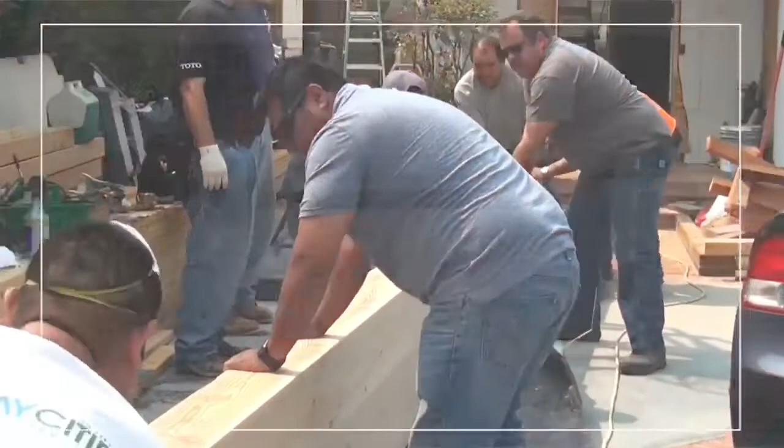It's been a while. We took some time to get some footage together and some pictures of Ridgecrest. For those of you that don't know, here in Southern California we had our biggest earthquake in 20 years, and it happened in the desert. So we went out there to check it out, to see what we can learn so that we can provide amazing projects for our customers.

And the best thing for us was to go out there and get into the field and learn how the ground broke, how the buildings behaved, and what we need to do. So let's get into it. So what can we learn from Ridgecrest?

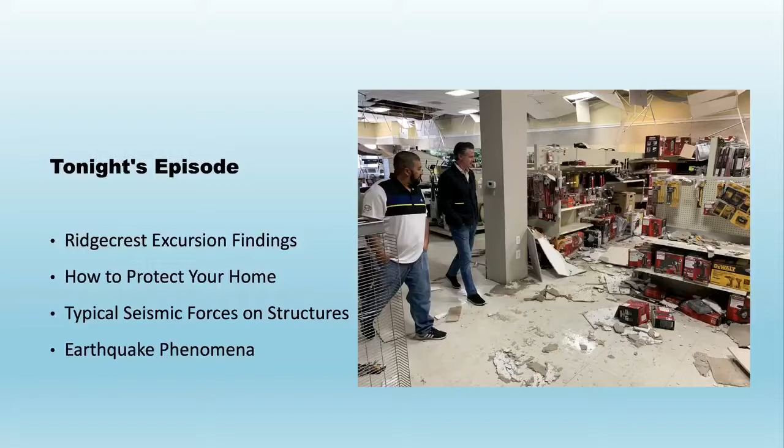Anyhow, so we're going to talk about how we're going to protect houses, what we learned, and how we can protect some houses. We're also going to talk about typical seismic forces on structures and the earthquake phenomena, like what happens during an earthquake and what kind of damage we can expect to see. So, Ridgecrest, the excursion begins.

So let's just do a little quick recap. Look, I'm not Dr. Lucy Jones. On the 4th of July, we had the first earthquake that ended up being a foreshock. And then on the 5th of July, we ended up having a 7.1. In case you didn't know, that's the biggest earthquake that California's had in 20 years.

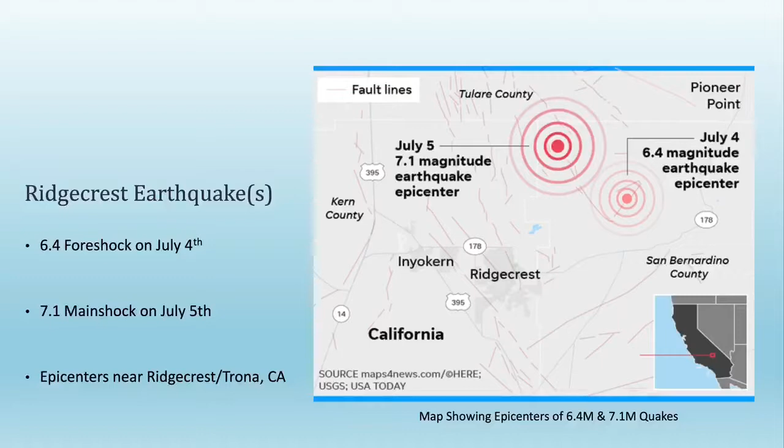And believe me, it's the longest. It was a lot longer than Northridge. It lasted well over a minute. Northridge is about 12 or 15 seconds, something like that. So it's definitely a lot stronger. Since the foreshock and the actual earthquake, there's been thousands of aftershocks, and I'm sure you guys have seen that stuff in the news.

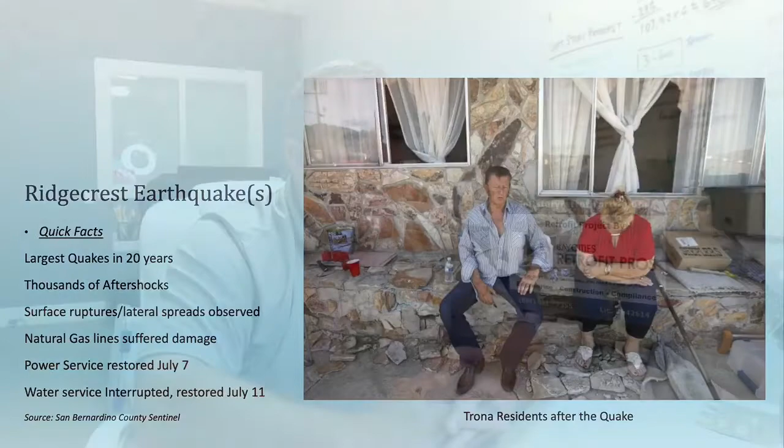I just recently went to the SEAOSC convention, and a few engineers covered a lot of damage, and they explained it. So I'm gonna share with you some of the knowledge that they passed on. The Structural Engineers Association of Southern California, awesome people, very talented, very dedicated engineers. So we're going to talk about some of the gas line rupture, power service.

Power wasn't restored, by the way, until July 7th. That's 2 days of no power. And the water was disrupted until July 11th. So remember, it was the desert. Not a good place to be without water.

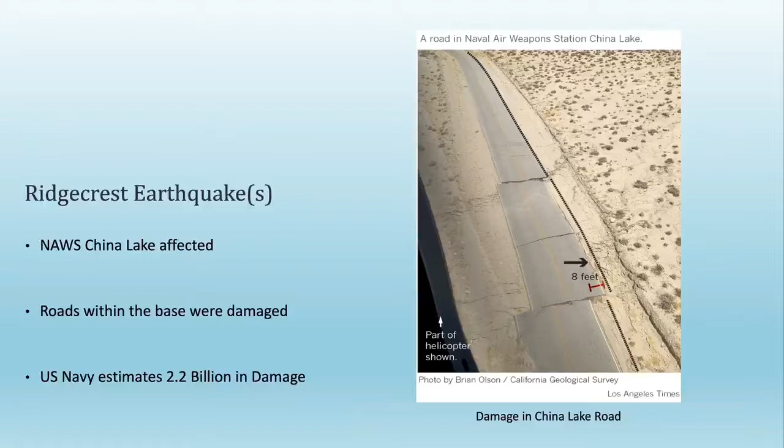So this is an overview shot of that road. We actually traveled on that road. It had been fixed by the time that we got there, but it was displaced by 8 feet. It's pretty significant. The naval base, China Lake, supposedly suffered a little bit over $2 billion worth of damage. That was probably catastrophic, but no one's been able to go down there. They haven't allowed the news cameras to see.

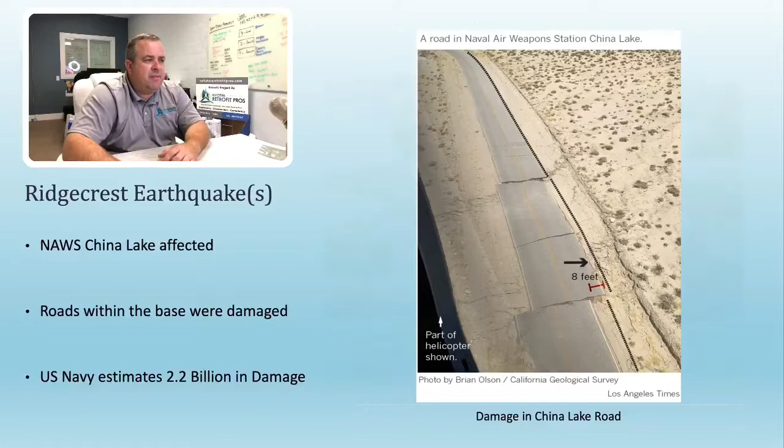So, people are speculating. I think the first numbers that came out were like 6 billion or something like that. So it's 5 billion, 5.5, a bunch of different numbers came out. So I think the agreed upon current number is about 2.2 billion. It's a lot, believe me. To have 2.2 billion dollars of damage in the middle of nowhere, there's a lot of damage.

So okay, so let's talk about what we learned. So this is one of the shots that Brian and I took, of a trailer park in Ridgecrest, and basically, I guess a good way to describe it is that it slipped off the foundation, or it slipped off the piers. So you can see here, this is a picture that I took. The displacement's about 20 inches. So where my hand is in this picture is basically the edge of the concrete.

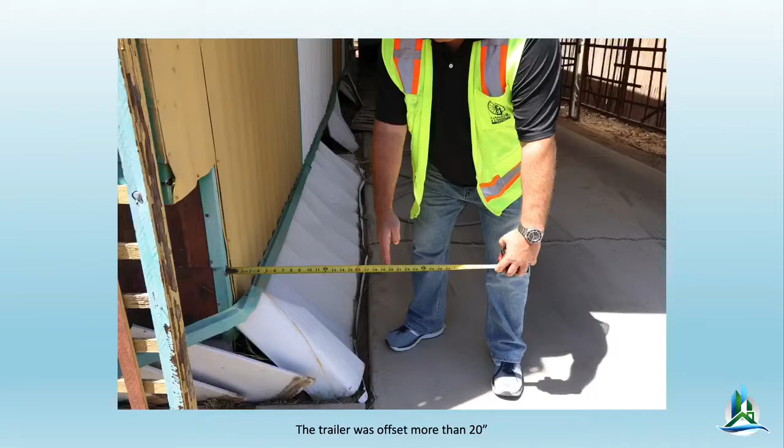And when the trailer slipped off the piers, it basically fell to my left in this picture, or actually, if we're looking at it, to the left. Anyway, it's pretty interesting to see that. Pretty much, maybe it was like 75% of the trailers in that park slipped off the piers. This one here, obviously you can see that it's got fire damage, it's a total loss.

But I was talking to some of the neighbors, and they explained to me that the owners were an elderly couple, and during the earthquake they got so freaked out they ran out of the house, and something was left on, and it caught fire. So I don't know. I mean, that's the story I was told in the field. I wasn't there.

But I think that it's important to note that if there would have been a gas shutoff valve on this building, and on some of the other ones that were burnt, for that matter, the shutoff valve would have tripped, and immediately the flame would have terminated. So at least hypothetically, that could have been prevented.

Now, I want to just kind of recap. This is a picture of the trailer park after the Northridge earthquake. It was in the North Valley. And again, this was all caused by fires. If people were to install this little easy gas shutoff valve on the gas meter itself, a lot of these fires could be prevented.

So let's talk about how to protect a home. For those of you who don't know, we do seismic retrofitting. We do earthquake bolt downs for single families, and we also do soft story retrofitting for big apartment buildings. We're going to be talking about houses now. The idea is that we went to Ridgecrest, we saw the damage, and now we take what we learned in the field and start applying it to bolt downs.

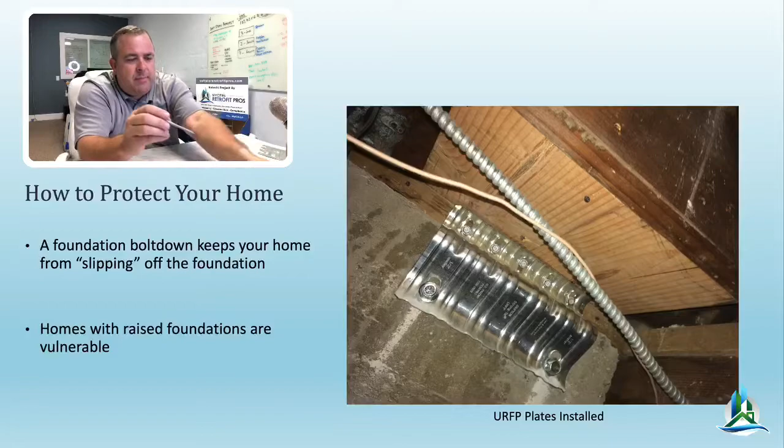So you use basically these bolts. These are SDS screws. Again, these come in the kit with the plate. So these go through here, and they screw onto the mud sill. And then in these holes here, we install Simpson Titens, or you can epoxy it. In our picture, this is actually a job that we did. It's not a completed assembly, but it's a nice close-up shot with good lighting, because it's hard to do that under the house. In this case, we pre-drilled the hole into the stem wall, and we put in a Simpson Titen bolt.

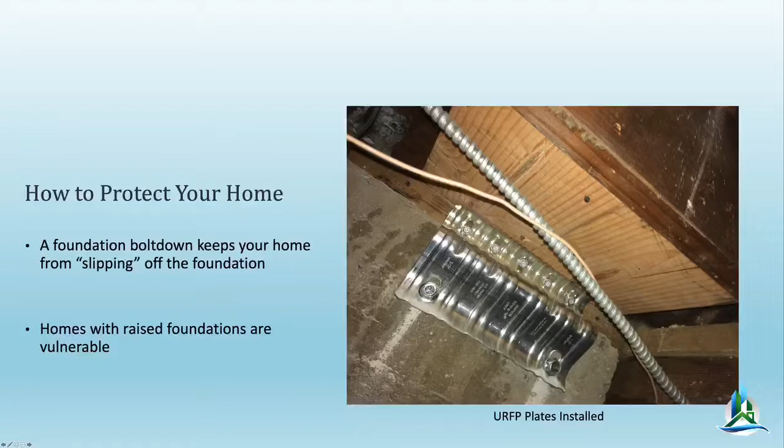It's an amazing piece of technology. It's approved to just drive it in to masonry, and you don't need any epoxy or anything like that. For those of you that notice there's a nice fresh piece of wood on our bolt downs, we install 4x blocking. That's 4 inches thick by, I think in this case, a 16-inch piece, and it's horizontal, and it's basically designed to help transfer the load over. I'll show you some of the pictures of this.

But what we're trying to do here is, if you notice, here's the 4x. This isn't finished, but in a scenario where the floor joists are running parallel to the stem wall, we'll put the blocking in place. And what we want to do is increase the footprint of the connections. So we want to add more wood to the existing building, and then we want to tie it into the new steel members, right? So this would be the new steel members.

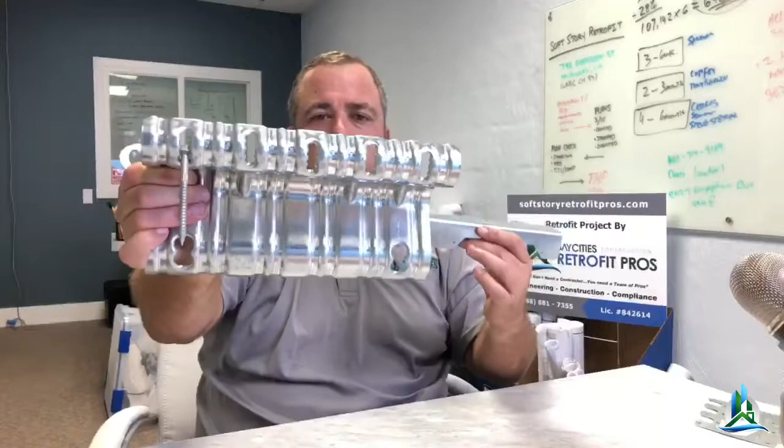In other cases, we tie the mud sill to the blocking. So this goes on the mud sill. This would be installed kind of like this, where this is holding the mud sill to the stem wall, and then this is holding the mud sill to the blocking, which is tying up the floor system, the floor joists. So together, you're going to get some pretty nice functioning drag. So let me show you the next diagram, because I think it'll put in perspective what we're talking about here.

Like Isaac, this is Isaac, one of my guys here. He looks like a train robber. It's pretty dirty in there.

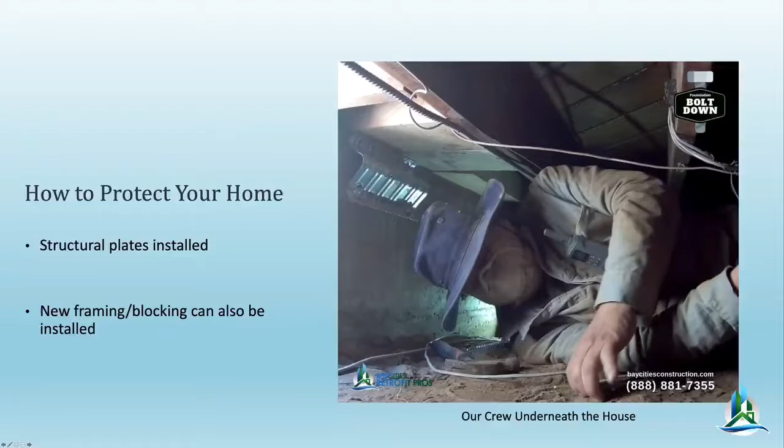But you wouldn't be able to put a new bolt in, so we put these plates in its place instead. And those will help transfer the loads. So this is another plate. Simpson makes this plate. It's a flat plate. If there's a scenario where the mud sill is flush with the concrete, you can use these. So you can use these interchangeably, this one or a flat plate.

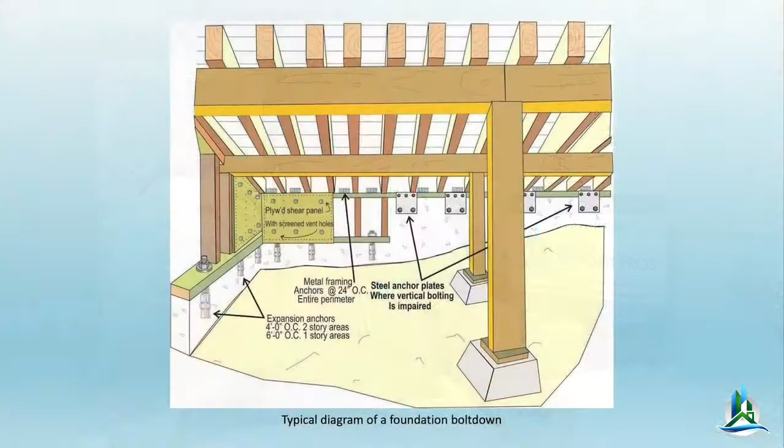Now, I want to bring your attention to these little clips up on top. These are called anchors. So the Simpson branded ones are A35s. These are super common, and they work really good. I think they have a transfer force of about 235, could be 335 foot-pounds. So you basically nail these, and it'll keep this kind of damage from occurring. I'm going to show you what we found over in Ridgecrest.

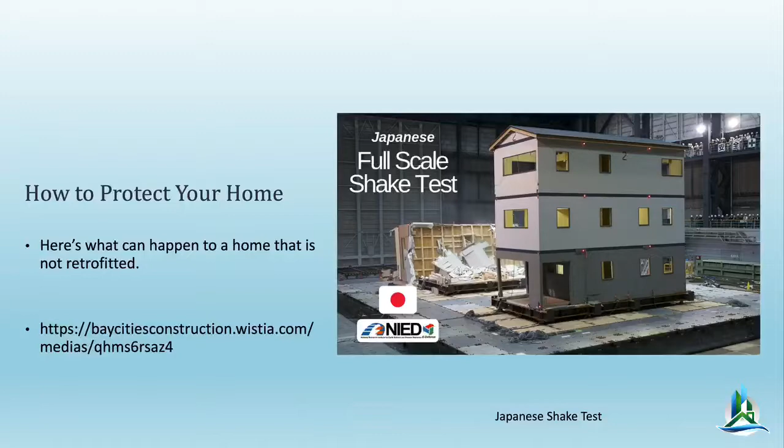Hey, so before we do that, let me show you this shake test. I really think you're going to find it interesting. This is a shake test the Japanese did, and it really shows how a structure behaves when it's undergoing an earthquake. Am I hitting that right there? Or am I hitting the picture?

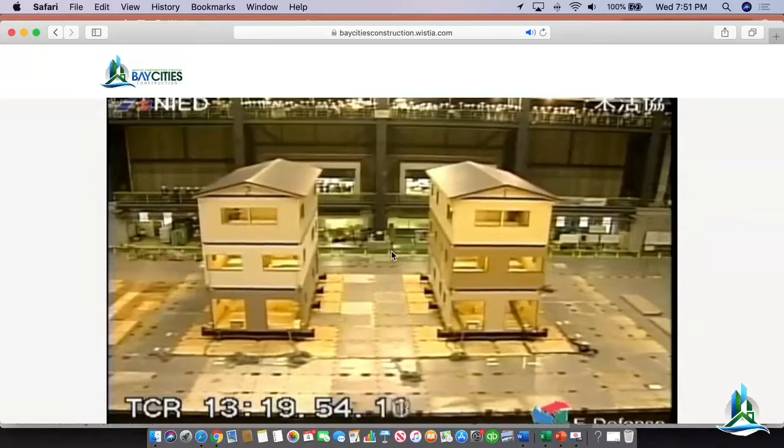So again, this is footage that's on YouTube, and what you're seeing here is the start of the earthquake. One of them is retrofitted with all of the new fasteners and all that. By the way, notice how the second and third floor want to stay in place, and the real movement is between the ground level and the second floor.

So what you saw there is basically the time that it actually tips over and breaks. There's a drift calculation that the engineers do to determine how much stiffness they want the building to have. And typically when it passes 4%, maybe 4.5%, 5%, you actually have a complete failure, which is basically when it's all over. Your house becomes a little bit of rubble.

So is this the last one, or is it over? That's it? Okay, cool. All right, so I don't know. What do you guys think about that? I'm really curious to see what your impression is, if you've seen that before.

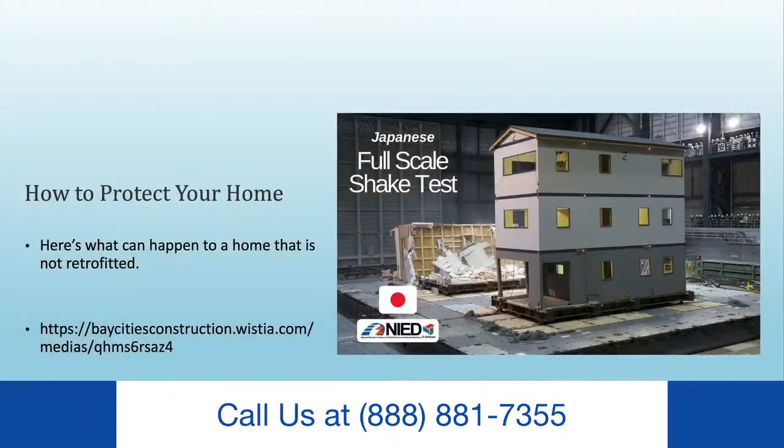I've watched the video hundreds of times, and it still kind of freaks me out. So anyway, hope you enjoyed that. That gives you kind of a perspective, an understanding of how the building is going to behave.

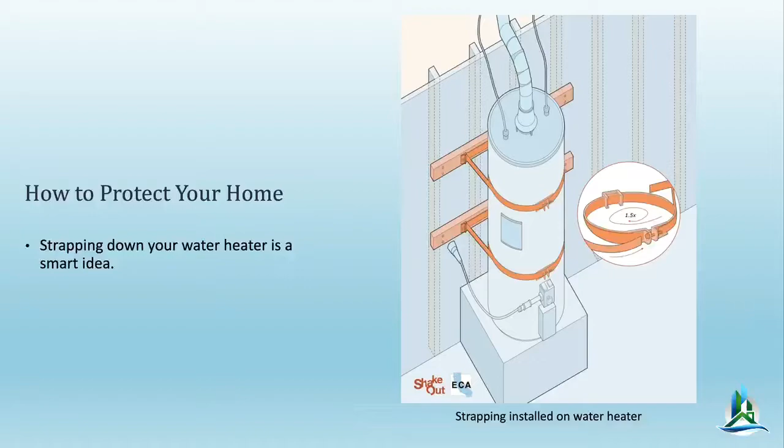The other thing you should consider when you're protecting your house is make sure your water heater is strapped in. And if you don't know how to do that, just get a handyman or a professional to do it for you. There's companies out there that are doing this stuff now. It's really important that you do that, because when the water heater falls over, the water heater will snap that gas line, and then gas will start pouring into the building, and all you need is a spark, and it's a bad day.

So these are two items that, if they were present in a building like this one that we took a picture of in Ridgecrest, that fire could have definitely been prevented for under $400. So for those of you that think, oh man, the valve's $400, this was a total loss, and the people had to move out. They had no place to live. So things to consider.

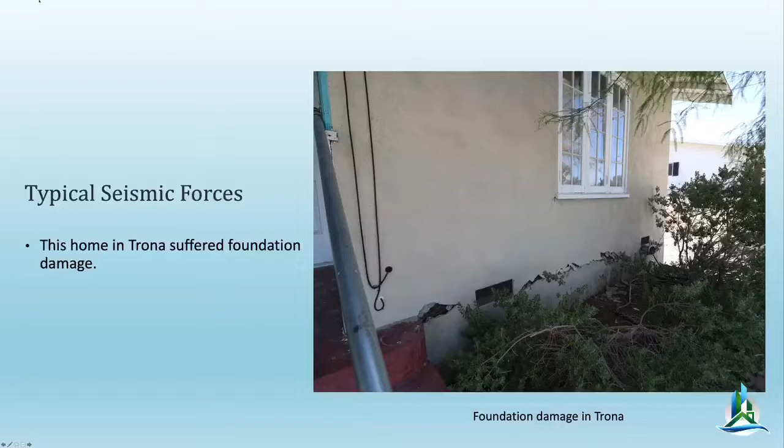So let's talk about the typical seismic forces, and what kind of damage the building can actually incur. So what you're looking at here is a single family house. This was, I think, in the little town of Trona. I kind of lost my mouse. Where's that guy? So what you're looking at here on the bottom, you can see the crack is parallel to the ground, and that's basically where the wall framing meets the mud sill, right? So it's the section that this thing is connected to.

The wall studs are sitting on that, right? So what ends up happening is that the ground is moving, because the earthquake is moving the ground, but the building isn't moving. So if there's no good connection between the building, the walls, and the foundation, you're going to get that break there. In fact, at first, it seemed like the house slips off the foundation, and I've got some diagrams coming up. I'll get into that in a minute, but let me just show you what we found over in Ridgecrest.

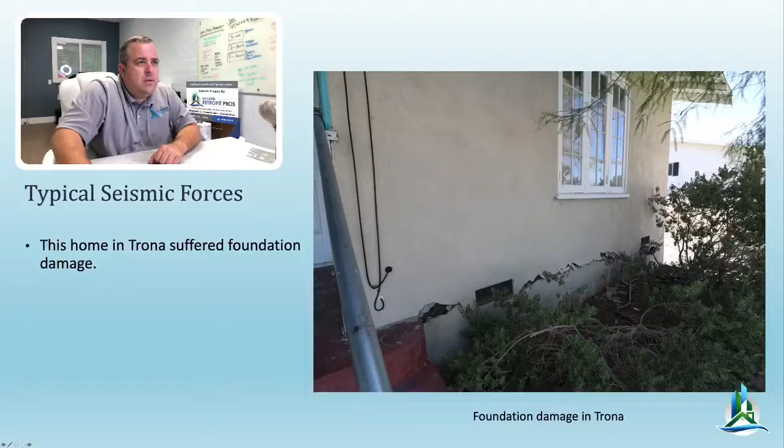Thank you. Okay. So here what you're looking at is this bottom section here where that big chunk of what looks like stucco flew out. So that actually looks worse than it is. That section of stucco broke, but the stem wall is kind of deeper in there. I don't know if you guys could see my mouse, but that's the actual stem wall. That's just stucco that peeled off. On this side here, you could see that the floor system pushed.

Basically, when the shaking stopped, the house stayed in its place. Can you roll over to me? Actually, how do I get a little diagram here? Excuse me, sorry, real quick. It's kind of cool to show it this way. This is the foundation. Can you see that in the shot? This is the foundation. Let's say this is the floor system, this wood section here.

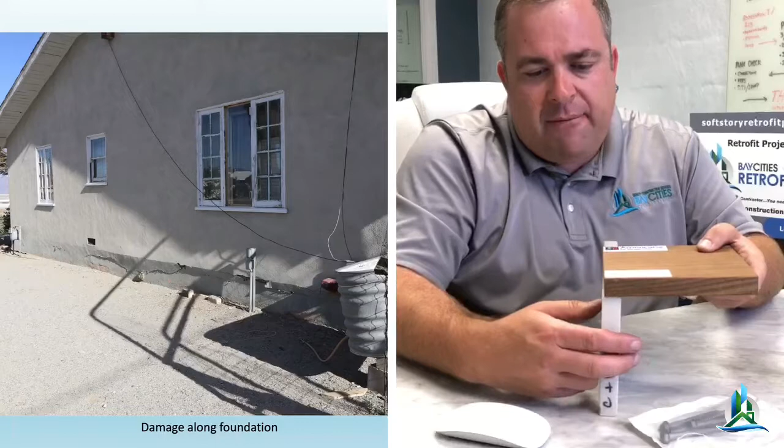So as the ground is moving and this connection breaks, instead of moving together, that connection broke and the ground started doing this. The house wants to stay still because it's got gravity on it. The ground is moving because it's experiencing the seismic waves. So this is what happened here. When the ground stopped moving, boom, the house is no longer flush like it used to be. After this movement stopped, it stopped like that. So you would think that the house slipped off the foundation, but really the foundation slipped under the house.

It's kind of a weird concept to get your head around, but that's actually what happened. So what you're seeing punching through that stucco wall is the floor system pushing through, because the floor system stayed in place, and when the foundation stopped moving, it ended up like that. I don't know if you can see that. Can you see it in the shot? Oh, my light's off. There we go. So when the ground stopped moving, the house just stayed there, and that's what you're looking at in the shot. Now,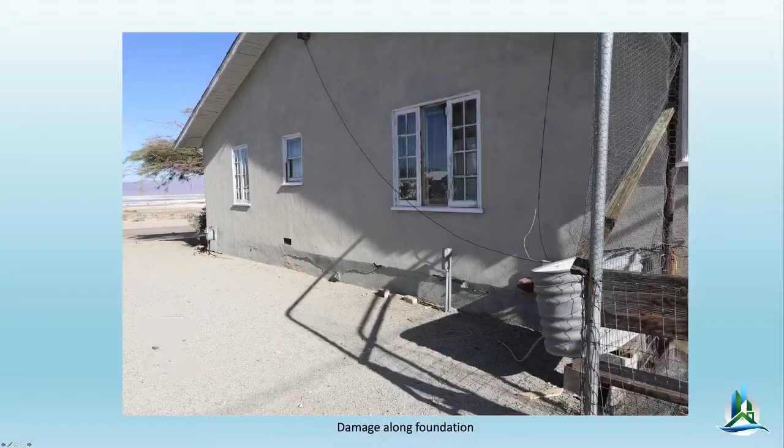So this next picture that I have here, whoa, I went back. This next picture shows you what the building is going to experience. Okay, so in the first one, you see sliding. House slides off the foundation. You could say the foundation slides away from the house. House slides off the foundation, sure. But you're going to get this motion.

Then the racking is when this little cripple wall starts to go beyond its design, and it starts to crush under the weight of the house. And then eventually, if this stays in place, but you don't hold the building down well to the cripple wall, it'll actually overturn, like in the video that you saw with the Japanese test.

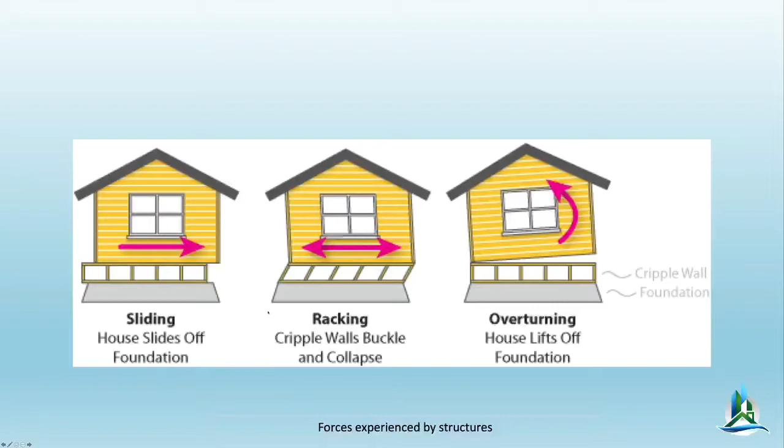All right, so let's talk about lateral spread, liquefaction, and other crazy things that happen. Okay, so this is a really cool shot. We were actually there on this street, and what you're looking at is obviously some cracks on the asphalt.

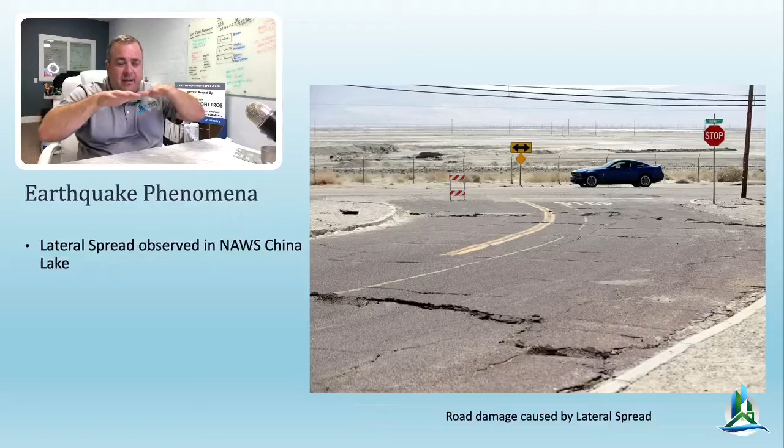So you'll get these cracks from lateral spread, and it's part of liquefaction. And what's actually happening is, think of the street as a sheet of earth sliding into the lake bed because of the seismic waves that are affecting the ground. I'm not a seismologist, but I do understand the very basic mechanics of what's happening here.

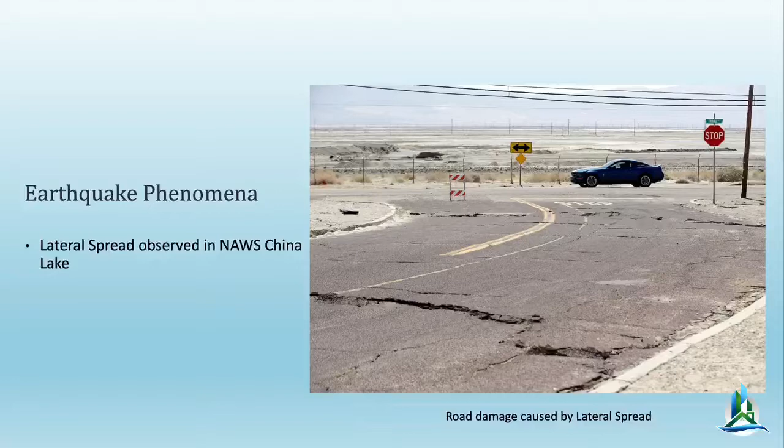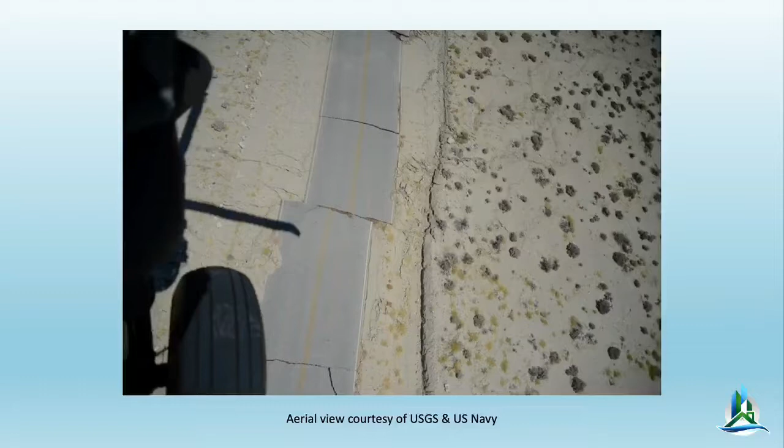So the earthquake waves destabilize the ground, and then it just slides into its lowest point. In this case, the dry lake bed behind the beautiful little Mustang there is the lowest point. In some places you'll see this crazy offset occur, and it's lateral spread, and in other cases, I don't know what the geologists call it, but it's basically uplift, where the ground breaks and either one part sinks or the other part pushes up. So that's kind of an interesting phenomenon.

And notice all of this crazy little spider cracking all over the sand on the left side of the road. The desert gets this little crust on it that's kind of hard, and when the seismic waves pass through the dirt, it shatters it like broken glass. It's kind of a trip. I noticed that the stucco had that same cracking, almost like a spider web pattern. It was kind of a trip to see that.

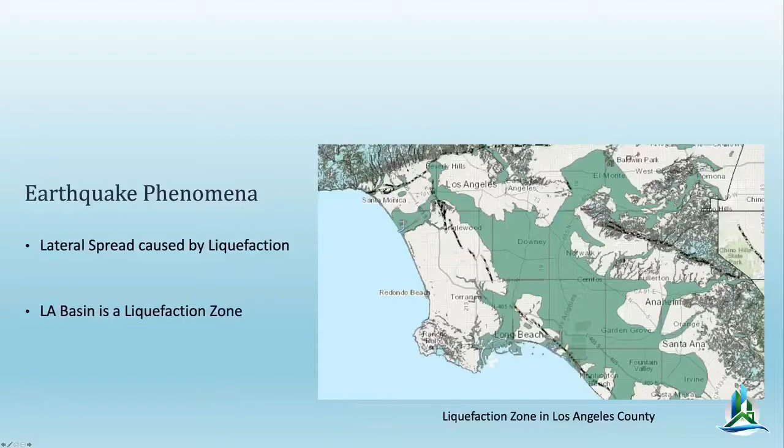So if you're wondering if you're in a liquefaction section, check out this map. The USGS has a ton of information. It's amazing how much stuff is out there that we're not aware of. So we put this map up there. I think that's definitely a USGS map, right? And the green area covers the liquefaction zones.

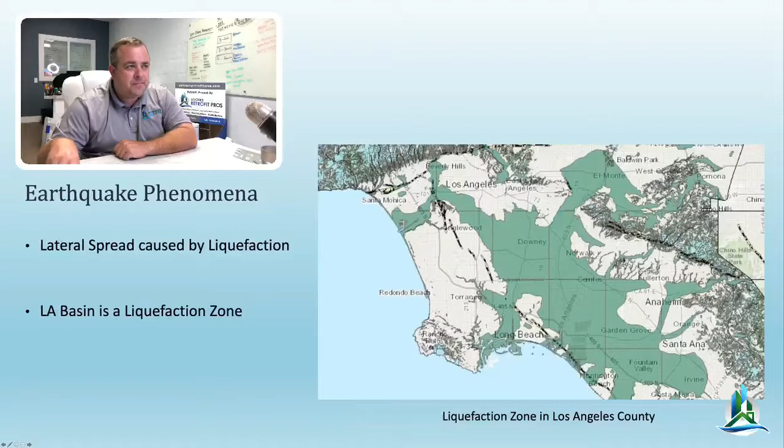Now I live in Redondo Beach, so you notice that there's a little tiny strip all along the coast, almost from the airport, and there's a long little strip there, and then Redondo Beach has got some liquefaction. There's some liquefaction peppered into Rancho PV, and then Long Beach and all this good stuff here. So liquefaction for buildings, it's not a good thing. It's all sorts of weird stuff.

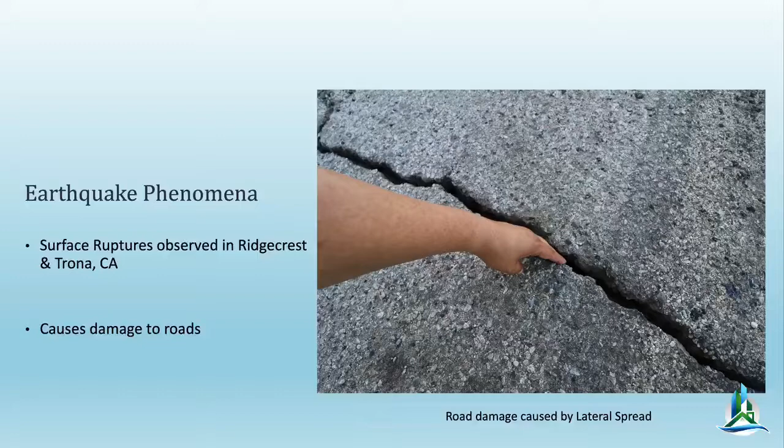Look up liquefaction on YouTube, and you'll see all these videos of the ground moving. It's a trip to see solid dirt no longer be solid. It actually behaves like liquid. So as part of liquefaction, you're going to get this lateral spread, and all of a sudden you have these big heavy pieces of masonry that are broken. That's actually my hand. I was able to get most of my hand in that crack. It was so wide. So it'll cause damage to roads, damage to buildings. It's a pretty gnarly situation.

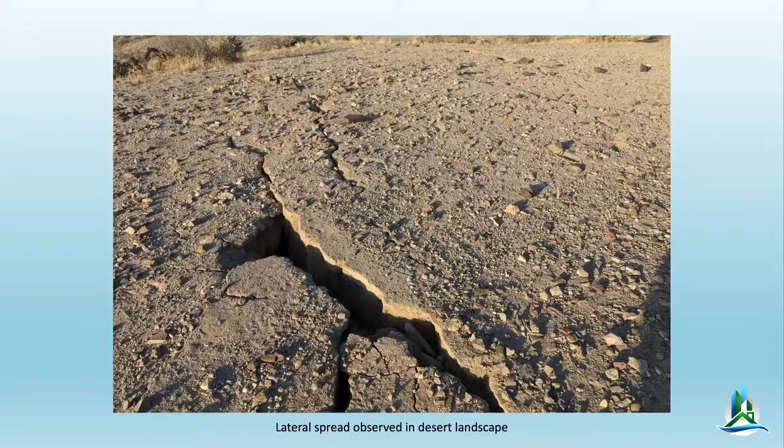All right, so in these pictures, we're back over the desert, and you can see that lateral spreading too, where basically there's no deflection. It just spreads. The ground spreads away from itself.

All right, so we got another little tip to help protect your investment, protect your houses. For those of you that may live in one of these buildings, this is a soft-story building. It's basically a building where you have ground floor parking, and then your living quarters are above that. And there's piers and stuff, and we have videos that talk about that a little bit.

But I wanted you to know, in case you're not aware of it, these buildings are required in the city of LA and Santa Monica to be retrofitted, and it's basically to prevent them from collapsing. So if you live in one of those buildings, make sure you watch our other videos on soft-story retrofitting. West Hollywood also. West Hollywood, Pasadena just passed the ordinance, and Beverly Hills.

So for those buildings, the retrofit looks something like this. This happens to be a Simpson special moment frame, and you basically attach that to the building, and it provides lateral force resistance to keep those walls from buckling like you saw in the Japanese video.

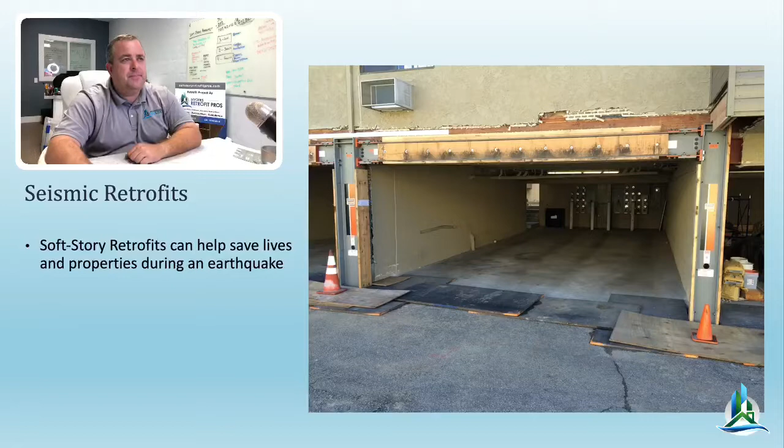Okay, this video here, sorry, I just hit that. So I was at the SEAOC, the Structural Engineers Association annual meeting in beautiful Squaw last week, and I was part of a seminar here. These were some of the figures taken from a GEER report. And what you're looking at is the current code, I think those are the solid lines and the dashed lines, the current code force resistance requirement. And then you're looking at the earthquake's actual felt force.

So whenever you look at these maps, by the way, they create a heat map. The red is the highest intensity level, right? So what I'm interpreting these graphs for you is, in this graph, this is the seismic force in relation to the current code. You could see that the earthquake felt slightly exceeds the code, okay? Now, when you're in the red zone of the break, you could clearly see that the seismic force experienced is way above the minimum code requirements.

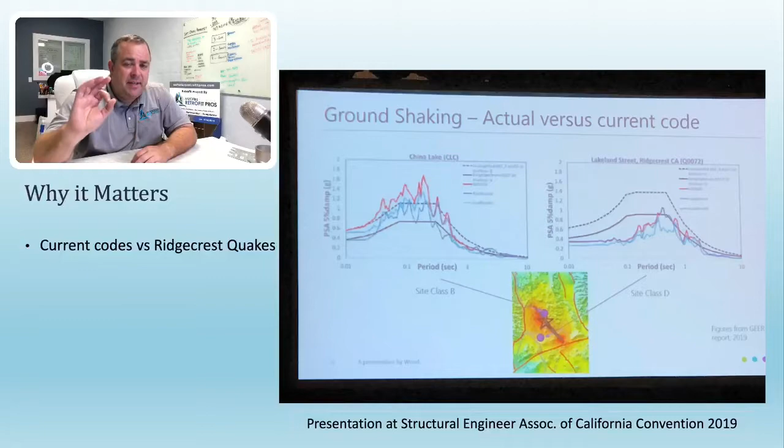So what we're interpreting from this data is that the minimum code is not enough. Remember, the code is life safety. That means the goal is for the building to not fall and kill you, all right? It does not mean that the building will make it, that the building will be resilient. That kind of data is captured in these two graphs. And I didn't make these graphs. This was presented by one of the very smart engineers at one of the lectures I went to. So it's very clear that if you're close in the red zone, the current code isn't enough.

Yeah, Mike, one of our viewers, wants to know why these seismic retrofit ordinances are being passed in all these LA cities. Well, mostly because of this information here. Those buildings won't make it. If you get hit with an earthquake that produces this kind of data, they're not going to make it. The soft-story buildings won't make it.

So the thing with the ordinance is they want to provide a life safety standard, right? They don't want people to die, and those buildings, as they were built, are not made strong enough to withstand an earthquake like that.

By the way, we've got several other faults that are much closer than the San Andreas or Ridgecrest that can produce a 7.1. The Inglewood fault can definitely produce a 7.1-plus earthquake, and there's any number. The Hollywood fault can also produce that kind of an earthquake, and those are right here. Those are not in the middle of the desert. Okay, those two faults, that's an L-shaped fault in Ridgecrest, and that was in the middle of nowhere.

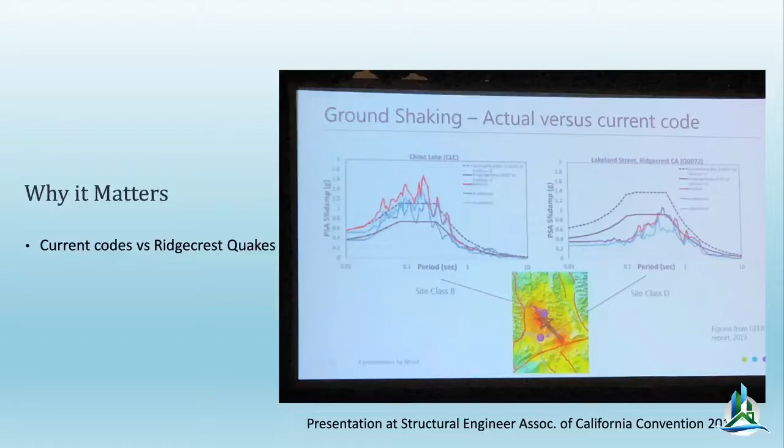It produced $2.2 billion worth of damages. What do you think it would do if we had an earthquake that strong in downtown LA, East LA, Redondo Beach? We would have well over $100 billion worth of damage. It would be a lot worse.

What are the questions we got? One of our viewers, Carlos, would like to know, how long does the average home retrofit take? Oh, it's days. One day, could be 3 days if you go hardcore. I mean, the most we've spent adding a lot of wood to a house was 4 or 5 days, something like that. That's a good question, though. And by the way, you don't have to move out. You don't have to shut the utilities off.

None of that stuff. And you should really consider getting an earthquake shutoff valve. We don't install that. If you reach out to us, we can definitely set you up with a very good company that'll install one of those for you really right away. They're very reputable, and some of the new valves are really impressive. So reach out to us for that earthquake shutoff valve.

It's important. Another viewer, Emily, would like to know: do you need permits or plans for retrofitting your home? Yes, so it is voluntary, but most of the cities will let us use, and we'll sketch that stuff up for you, all of the notations and stuff from the LADBS pre-approved plans. It's super easy. I can handle all that stuff for you. You don't have to do it, but it's really easy to get your building permit squared away in the event you want one. We got any other questions?